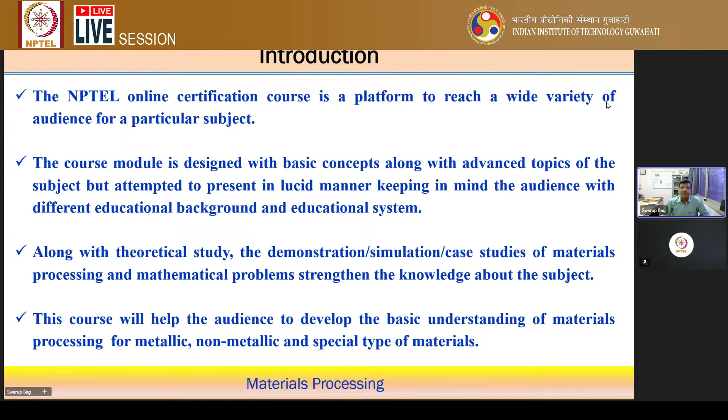This course is basically focused on the very basic understanding of materials processing, covering all types of materials: metallic, non-metallic, and in a few cases very specific types. Although you have not mentioned any specific questions you want to ask related to this course, and I have not received any such request, I have prepared my own understanding of where there might be some difficulties understanding specific topics. I'll try to cover these topics once again in a more simplified way, so that you'll be able to follow it.

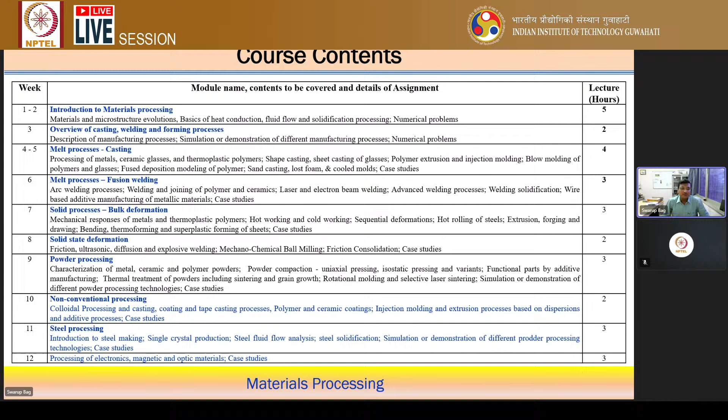I believe at this point of time we are in the last modules, maybe close to modules 10, 11, 12, given the progress of the course. So focusing on these particular modules, in very selected topics. And of course, every time I say this, if you are really interested to go into much more detail about materials processing, you should go for the wide references I have already mentioned. It's a very selective set of references, and if you're interested, there is wider coverage of the subject there. You can follow any one of the references as per your requirement.

But till now, the most common questions usually raised are about what type of question will come in the exam. I think that is the most appropriate question from your side. So simply follow the assignment problems, solve the assignment problems, and you can expect a similar pattern of question and similar marks associated with this final exam.

So it can be kind of multiple choice type questions, of course, and maybe both theoretical and numerical type questions will be there associated with this particular subject.

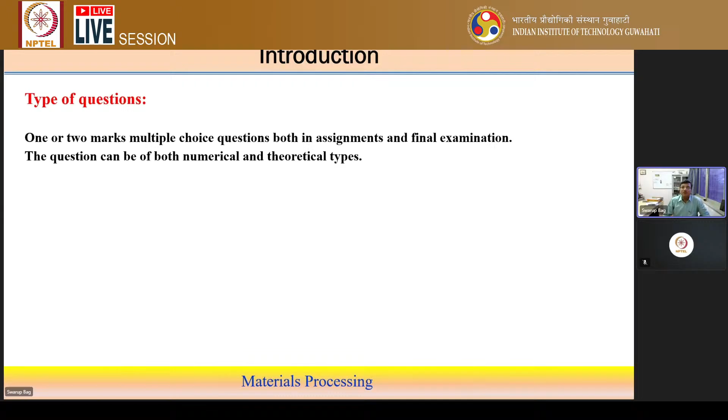Now I come to this point, the selective topics. I'll start with this non-conventional processing, the colloidal processing and casting process, basically known as the slip casting process. This is one of the important manufacturing technologies for handling ceramic materials. We can make different components using the slip casting process.

How does it work? We use the raw material in the form of a slurry. Slurry means a solution containing fine clay, which is called an aqueous slurry, having very fine clay, which is also known as the slip—that's why it is called the slip casting process. This is put into some porous medium, basically a porous gypsum mold, maintaining a certain concentration of fine clay with the aqueous solution for a certain time.

After a certain time, once a certain thickness is deposited and it takes on a particular shape, achieving some rigidity, we take it away and follow the next secondary procedures, simply heating, drying, and so on, to achieve the final product. So this is how we follow the slip casting process, and the deposition of the clay over the porous gypsum mold can be accelerated in different ways.

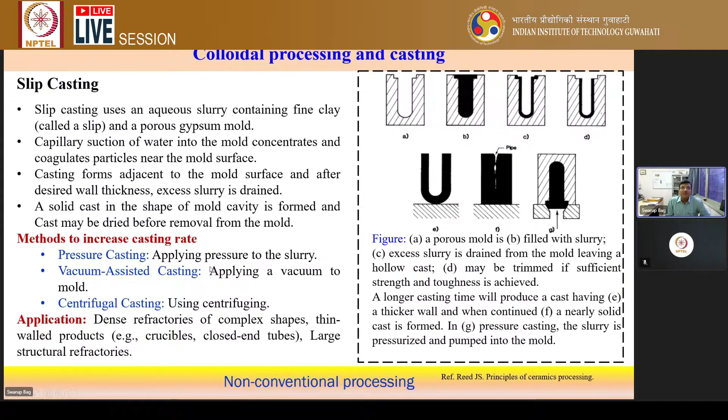So this way the ceramic component is usually made. But this is not the only procedure to make complete ceramic components. Once some rigidity is achieved, you take it for further processing, drying it to make the part more rigid. This way we can produce any kind of ceramic component simply using the slip casting process.

Similarly, we can follow the tape casting process. Tape casting isn't exactly for making a complete big product; rather, we use it for the purpose of a coating process. It is a technique to produce very thin ceramic sheets from ceramic slurry. That means from the slurry we produce, we produce a very thin sheet.

Here's how it works: a dispersion containing ceramic particles along with polymer binder is coated over a substrate. The liquid dispersion is deposited and spread over the substrate, and subsequently solidified.

Once it makes a very thin sheet with a flat surface, we follow the procedure of drying and the sintering operation. Then it becomes harder, and we finally reach the component.

This type of tape casting process is a very well-known technique for producing membranes made of ceramic, to manage or handle the ceramic process. We cannot follow the other conventional casting used for metallic material; we cannot follow a similar procedure to perform the casting of ceramic material.

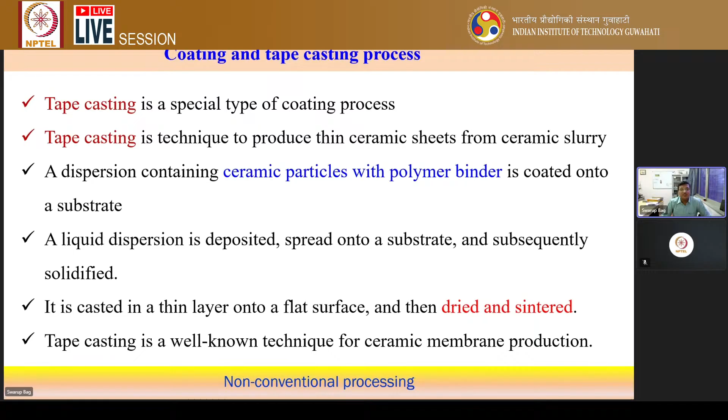So for the ceramic part, whether it's ceramic coating, a very thin sheet, or a big component, in those cases we follow either the slip casting process or the tape casting process. It's a simple process, but we use it.

Now this is material processing. One of the most important aspects of material processing is steel processing, how steel is manufactured. So I'll cover a little bit here to give you a basic understanding of the different types of steel.

One is low carbon steel, medium and high carbon steel. Low carbon steel has carbon percentage less than 0.3%, with microstructure usually ferrite and pearlite phases. Medium carbon steel has a range of carbon around 0.3 to 0.8%, and it forms bainite or martensitic structure. High carbon steel usually has more than 0.8% carbon, and it can form martensitic structure.

So that phase usually forms martensitic structure, and therefore strength actually increases. We know martensitic phase is harder compared to the ferrite or pearlite phase. Strength increases with increasing carbon content, but at the same time properties like ductility and toughness decrease with increasing carbon content. This is the very general trend we can understand for property variation with respect to carbon percentage in steel.

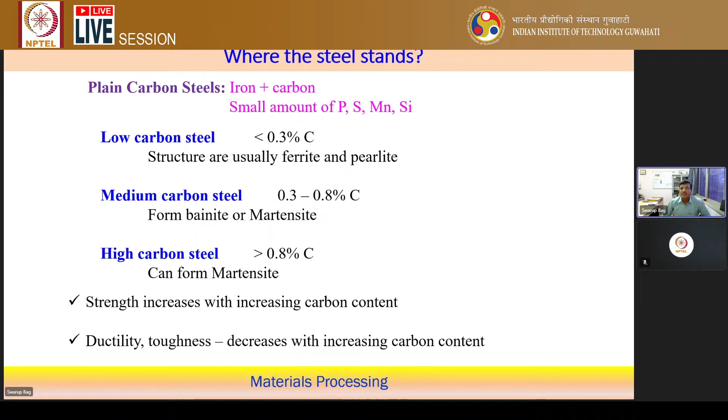Plain carbon steel is actually having iron plus carbon, along with very small amounts of phosphorus, sulfur, manganese, silicon. These are present in very small percentages and influence properties in different ways, but the quantity might be very small. The main alloying component for plain carbon steel is iron plus carbon, and the carbon content is more important here rather than the small amount of other alloying elements.

Now we also see the different kinds of alloy steels. In alloy steel, the alloying elements are added to the steel, usually in small quantity, less than 5%, to improve certain specific properties. The percentage of carbon and alloying elements is developed depending upon lots of trials and experiments, and that's how we achieve different kinds of alloy steel.

Alloying elements, when added in much quantity, sometimes up to 20%, produce very specific properties such as corrosion resistance. For example, in stainless steel, although the carbon percentage is low, the chromium percentage might be very high, so that it imparts corrosion resistant properties.

This means that a very specific element imparts certain properties, which is why there are so many variants of steel available. The main alloying elements for steels are manganese, silicon, copper, chromium, nickel, molybdenum, tungsten, but the percentage can vary in different ways.

Overall, understanding that there are very basic types of steel: HSLA, high strength low alloy steel, micro alloy steel, maraging steel, stainless steel, tool steel, silicon steel. These are very common names of steels used in so many engineering applications. High strength low alloy steel is basically used in structural applications, mainly building construction or bridge construction.

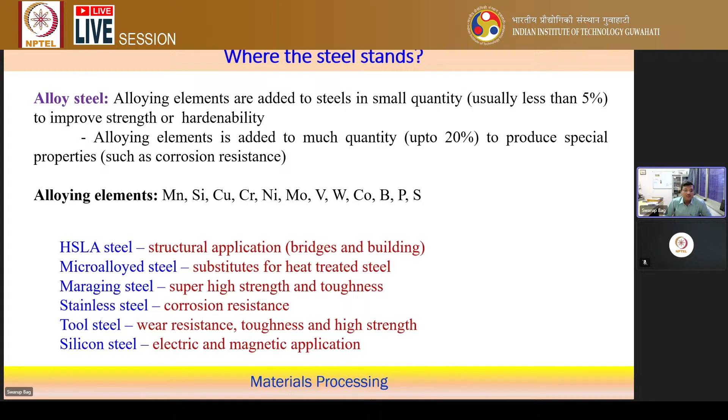Similarly, silicon steel finds more application in electrical and magnetic applications because of the very basic properties of silicon. So we can see that different compositions give different kinds of steels, and their application areas are also different. There are so many variants of steel possible, each having its own advantages and very specific properties, and sometimes manufacturability of a particular steel is also a factor.

Now, when we come to iron: on one side we have steel, with less than 2% carbon, usually known as steel. But cast iron is an alloy having more than 2% carbon—that is the boundary that divides steel and cast iron.

In case of cast iron also, there are different variants. Molybdenum and nickel are frequently added to improve the hardenability of the cast iron component. The properties of cast iron actually depend on the way carbon exists within the structure, whether in the form of graphite or in the form of cementite—that decides the structure and properties of the cast iron.

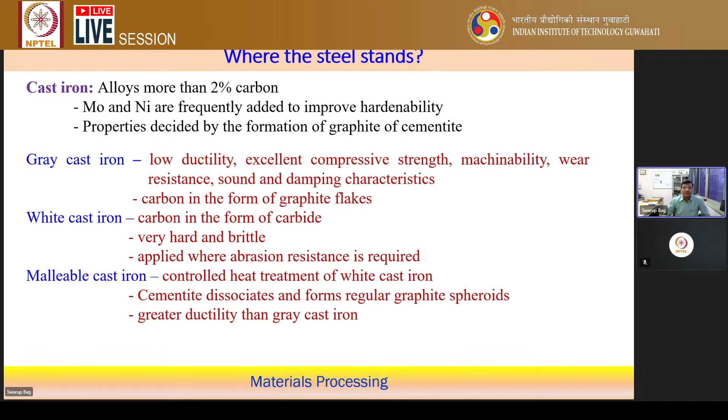For example, there are usually three different types of cast iron: gray cast iron, white cast iron, and malleable cast iron. In gray cast iron we have very low ductility, excellent compressive strength, very good machinability, wear resistance, and very good sound and damping characteristics—this is how gray cast iron achieves these kinds of properties.

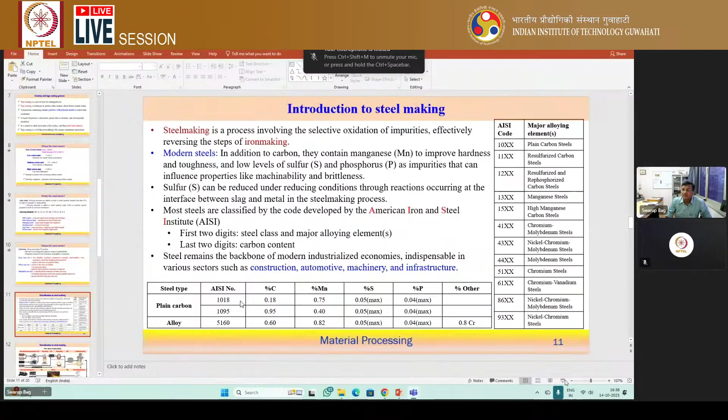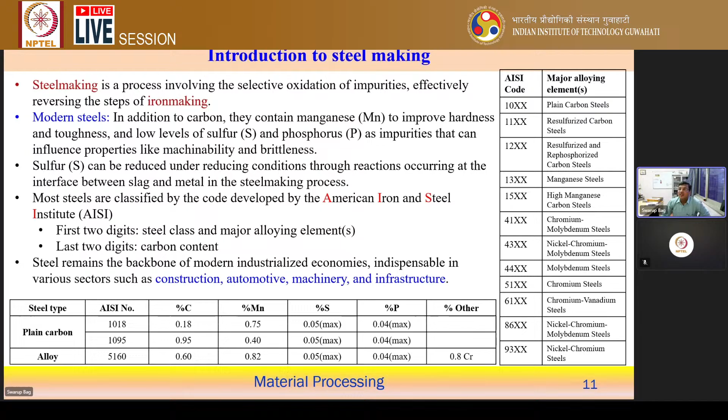That's why steel making is easily done. Most steels are classified as per the American Iron and Steel Institute, AISI code, which we use to understand the different types of steel. The first two digits indicate the specific class of steel and the major alloying elements, while the last two digits indicate the carbon content. Steel is the backbone of modern industry, so there are many applications using steel, and it's important to understand the different steel making processes. Following the AISI code, if the first two digits are 10, that means plain carbon steel, with a very low carbon percentage. If we see 15, that indicates high manganese carbon steel.

Depending on the unwanted agent, once the first phase is done, the material reaches the blast furnace, and then basic oxygen steel making occurs, where we control the alloying in the basic oxygen furnace. So first is iron making, then steel making to control the addition of different alloying elements. Once that's done in the furnace, we use a ladle to carry the molten steel to the continuous casting unit, where we produce semi-finished products like blooms, billets, and slabs as per requirement.

Once the semi-finished product is produced, we follow different manufacturing operations, mainly the rolling process, metal forming operation, and hot rolling process, to finally reach different construction products in different shapes - pipes, sheets, solid bars, square bars. All this can be done using the rolling operation, or metal forming operation. This is a continuous process.

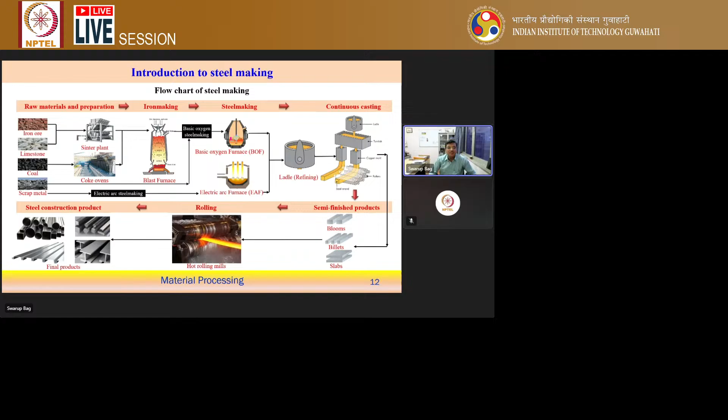In the steel industry, we start from the ingredients - iron ore and limestone - and use a furnace. Then we control the addition of alloying elements to form steel. Then we follow the casting operation to produce a semi-finished product. From that semi-finished product, we follow another rolling operation or forming operation to reach the final component. This is the complete cycle of the steel making process.

Now, apart from steel making, sometimes it's important to produce a single crystal structure. This process is usually very costly - the cost might be more than that of regular steel making. Why is there a need for a single crystal? Because a single crystal means a uniform and continuous crystal structure throughout the entire material. That means there might not be any grain boundary - no polycrystalline material, no multiple grains will be produced in this particular case. So this can be produced with utmost care for a particular component.

This is very specific because there's probably no grain boundary, so the yield strength might be low, but at the same time, there is a very minimum amount of creep possible to achieve in the case of single crystal structure. That's why very high performance industries, such as aerospace, power generation, and automotive industries, use single crystal structure. One example is the turbine blade - we can say this is a single crystal structure, an engine component where the life might be very high. So we try not to produce polycrystalline structure, and rather produce the single crystal structure.

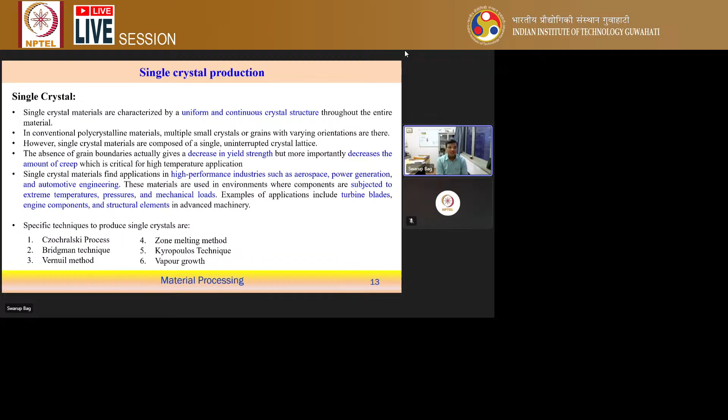There are many methods to produce single crystal structure, a few of which are listed here. One process I want to look into is called the zone melting method, which is a very simple method.

In this case, we create a liquid zone by melting a small amount of the whole metal by externally heating it using a lamp. We can heat it and create a small molten zone, and that molten zone can be gradually moved to comply with the moving solidification front. So we are not extending the molten zone, rather we move it so that the solidification front moves with the same velocity.

So in zone melting, we melt a very specific zone, and this allows manipulation of the distribution of impurities or phases within the solid. When melting, the impurities segregate: lighter impurities come to the top surface, heavier impurities come to the bottom surface.

So we are basically collecting the impurities by melting in a very localized position, a particular zone, and then gradually moving along, collecting the impurities present there. At the same time, we follow solidification in a particular direction, and we can produce the single crystal structure this way. This is the simplest way to produce it—this is called the zone melting method.

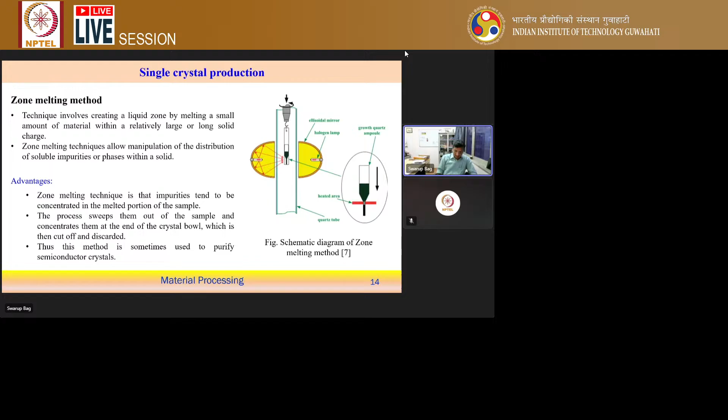Now let's look into steel solidification with reference to the equilibrium phase diagram, and try to understand the kind of steel here. Steel solidification is understood as the transformation of molten metal into the solid state, and when it transforms into solid state, different phases can be produced, producing different kinds of microstructure and different properties.

The properties will not vary too much, but of course some variation must be there depending upon the microstructure we develop after solidification in the steel industry. For example,

alpha ferrite—alpha ferrite is basically the solid solution of carbon in a BCC system. But alpha ferrite exists only at very low carbon percentage; the solubility of carbon is very, very low. The maximum solubility is only 0.02%, and that happens at a particular temperature, 727 degrees centigrade, which is the eutectoid temperature.

We can have the maximum solubility in delta ferrite. So here, it means very low carbon percentage gives us the ferrite, alpha ferrite structure.

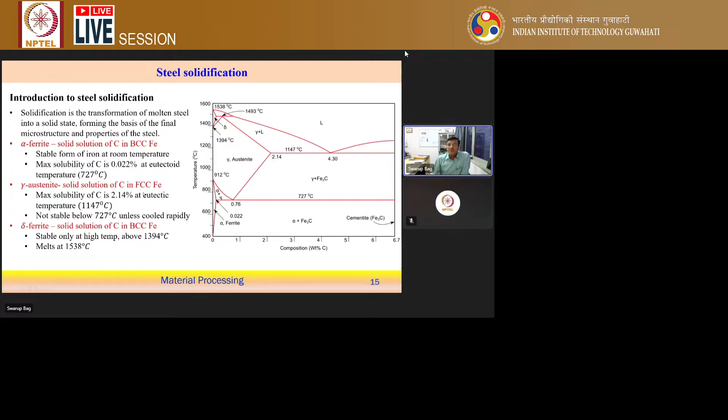Now, if we follow this structure, we can produce the eutectoid steel, which is called the pearlite structure. In this case, the steel composition carbon percentage is 0.77%, also known as 1077 steel. As per the AISI index, we can find the carbon percentage is 0.77% carbon.

In this case, it actually produces the unique structure called the pearlite structure. Pearlite structure is basically when steel is heated to around 800 degrees centigrade for just 1 or 2 minutes, it will consist entirely of austenitic grains. Then when you cool to 727 degrees centigrade, holding for 5 to 10 minutes at this particular temperature, the austenitic phase completely transforms to the pearlite phase.

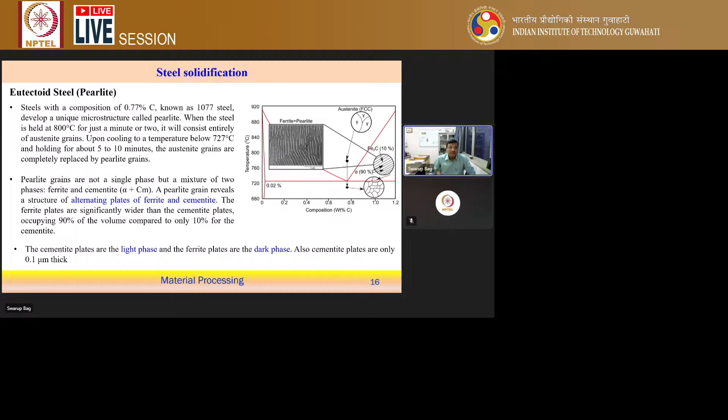Now, with respect to the eutectoid composition of eutectoid steel, we can distinguish hypo and hyper eutectoid steel. Hypo means below 0.77% carbon, and hyper means above 0.77% carbon in the steel.

In the case of pure iron, we see the austenite gradually transform to ferrite when cooling to 912 degrees centigrade, and adding carbon to the iron lowers this temperature. If you lower the temperature further, in this case the maximum can go up to the eutectoid point. The eutectoid point represents a specific temperature and composition on the phase diagram, where a reaction occurs: one solid, the austenitic phase, decomposes into two different phases.

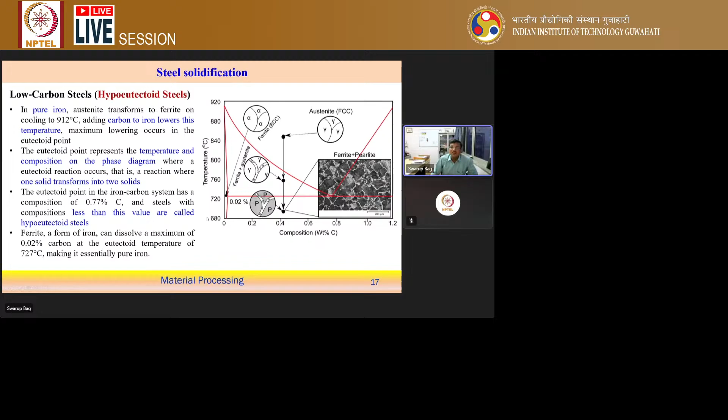Actually, the ferrite structure is almost pure iron because the carbon percentage is very, very low. Austenite is another form with carbon - it can dissolve more carbon than ferrite, but upon holding, austenite transforms to the pearlite structure at 0.77% carbon at this particular temperature. Austenite has an FCC phase, but ferrite has a BCC structure.

So, if we look at steel composition with 0.4% carbon, that means the carbon percentage is less than the eutectoid composition. So if it is cooled from 850 degrees centigrade to room temperature, what will happen? A different transformation will occur.

In this case, ferrite forms as a number of alpha grains along the prior austenitic grain boundaries, as we can see from the figure. This is the complete austenitic phase, and then the ferrite phase tries to form along the grain boundary of the austenitic phase. As the temperature is lowered further below 727 degrees centigrade, it creates the pearlite phase.

There is a pearlite phase along with the ferrite phase, following a specific morphology. So at room temperature, below 727 degrees Celsius, this austenitic grain will completely transform into pearlite grains, which is a combination of the ferrite plus cementite phase.

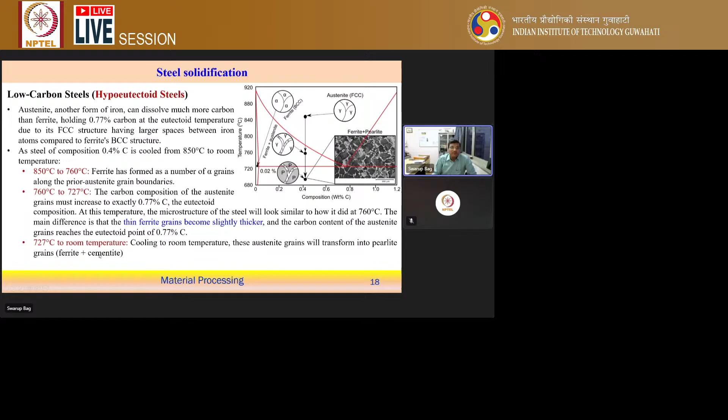Now, hyper-eutectoid steel is basically high carbon steel, with more than 0.77% carbon in the steel itself. In this case, increasing the carbon percentage dissolved in the austenite pushes the iron atoms apart, therefore stretching the chemical bond because it tries to absorb more carbon in this case.

At around 820 degrees centigrade, the solubility limit of the austenitic phase is around 1% carbon. This means 1% of carbon can dissolve in the austenitic phase at this temperature. So if you further cool it, the cementite forms with its fixed composition of 6.67% carbon.

The cementite phase is actually very brittle, so this definitely affects the properties of the steel component, including its mechanical properties.

Now if we look into a steel composition around 1% carbon, cooling from 850 degrees centigrade, between 850 and 760 degrees centigrade the austenitic phase transforms to austenitic plus cementitic phase. Along the grain boundary, we produce a cementitic phase, and this is true in case of hyper-eutectoid steel. But in hypo-eutectoid steel, the grain boundary usually has the ferrite phase.

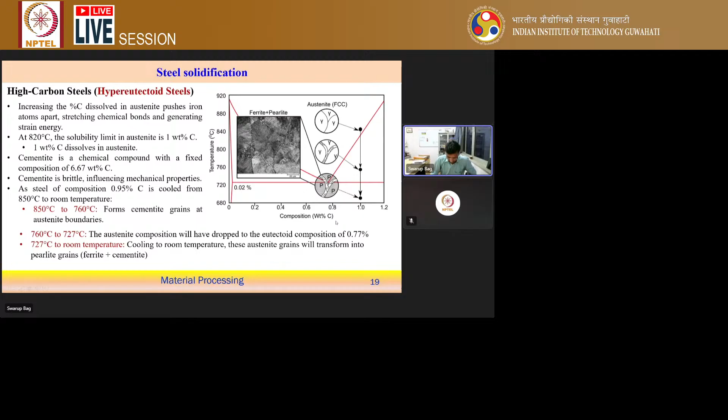So that's all. In this session we tried to explain the different kinds of steel structures and the steel making process. I think it helps to understand this topic in a better way. Thank you very much for your kind attention.

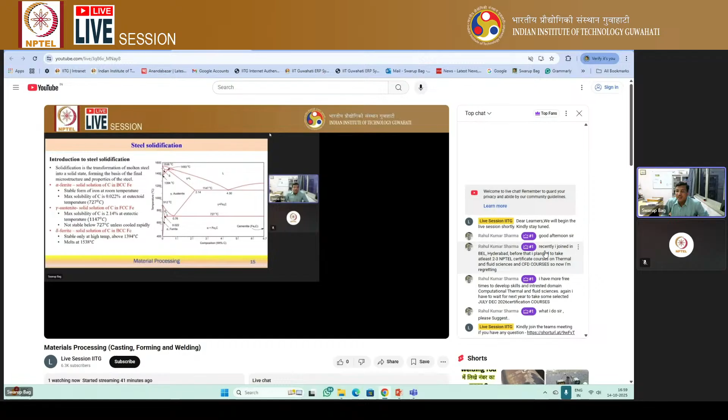NPTEL courses will definitely help you understand the subjects in a better way, and you also have free time to explore different types of courses. But what I suggest is to take any courses in thermal fluid science as per your interest and your working area — that will definitely be helpful.

But be serious about studying these things. When the video is released, carefully follow it, and at the same time try to solve the assignment problems following the video lectures. That will help you develop the skill to understand the subjects in a better way.

Once you understand the subjects, you can apply them in any field, maybe in applications or manufacturing. But I believe some basic understanding from these courses is required before you apply it to real world problems. You can follow any semester, because every semester many courses are floated, but you have to choose the right courses where your interest lies.